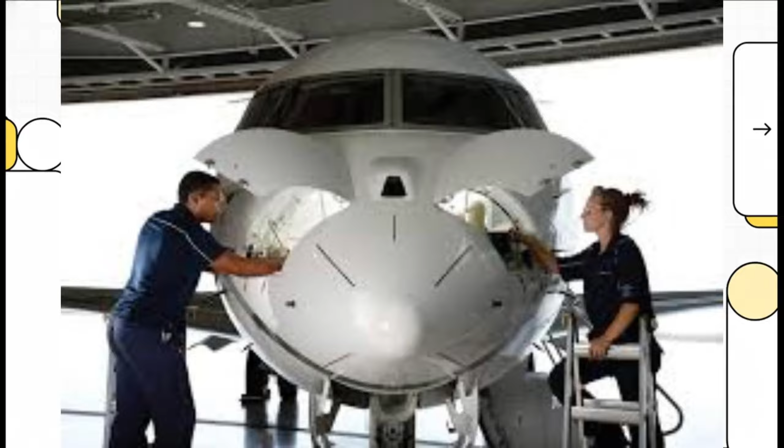You know, whenever we think about flying, our minds pretty much jump straight to the pilots, right? They're the ones in the cockpit, the visible face of safety. But behind the scenes of every single flight, there's an unseen guardian, a professional whose signature is literally the final word on whether that plane is safe to take off. And their story? Well, it's one of incredible responsibility.

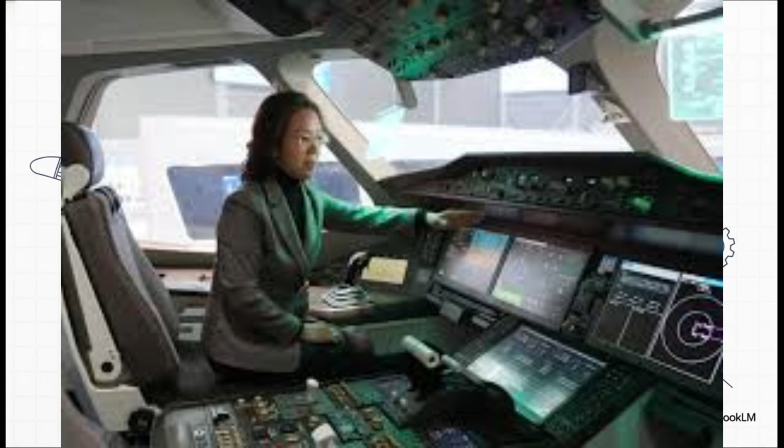So let me just ask you this. We all know the pilot is in command once the plane's in the air. But who holds the ultimate legal responsibility for that aircraft's condition before it even pushes back from the gate? The answer? Well, it might surprise you, and it shines a light on a critical role in aviation that most of us never, ever see.

The answer is the Aircraft Maintenance Engineer, or AME for short. Now, it's so important to get this right from the start. This is not just a mechanic. An AME is a licensed professional recognized by huge international bodies like the ICAO. They don't just fix things, they legally certify that the aircraft is airworthy. In other words, that it's safe to fly.

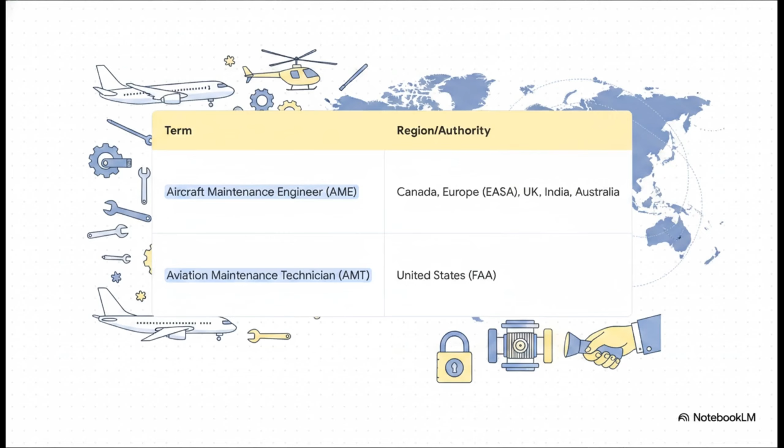Now, depending on where you are in the world, you might hear a couple of different terms. In places like Canada, all across Europe, the UK, India, and Australia, they're called aircraft maintenance engineers. But head over to the United States, and the FAA calls them aviation maintenance technicians, or AMTs. Here's the thing though, no matter what the title is, that immense responsibility is exactly the same.

So what does a day in the life of one of these pros actually look like? Let's take a walk through a typical shift for an AME who's working on the line. That's where the planes are actively coming in and out. It is a high-stakes, super fast-paced world that demands absolute precision.

A shift doesn't kick off with grabbing a wrench. Not at all. It starts with data. AMEs dive deep into the aircraft's logs from previous shifts. They huddle up with their team to talk about priorities, and then they map out a precise plan of action. It's this methodical, almost surgical process that happens long before they ever physically touch the plane.

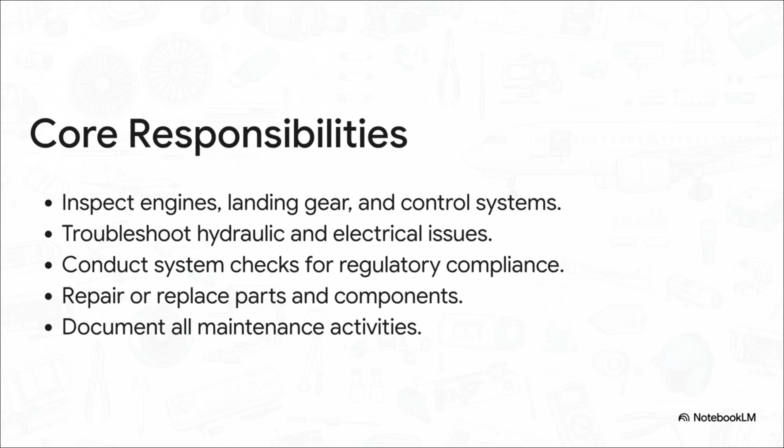Okay, once that plan is set, the real hands-on work begins, and the scope is just massive. We're talking about inspecting the very heart and soul of the aircraft. The engines, the landing gear, the flight controls, they have to be digital detectives, troubleshooting incredibly complex hydraulic and electrical mysteries. And through all of it, every single action has to be meticulously documented. Because in aviation, there's a saying, if it isn't written down, it didn't happen.

And this is exactly why that paperwork is so important. You have to understand, aviation is one of the most heavily regulated industries on the entire planet. Every single thing an AME does is guided by official manuals, just like this one from the FAA. There's zero guesswork. Every repair, every inspection is done strictly by the book, and it becomes a permanent part of that aircraft's legal history.

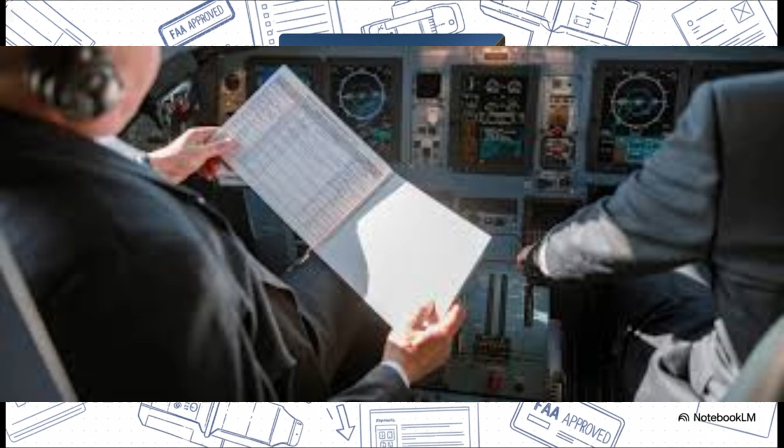This all brings us to the real core of what we're talking about today. We've been using the words mechanic and engineer, and yeah, they might sound similar, but in the world of aviation, the distinction between them is absolutely monumental. We're talking a world of difference in responsibility, authority, and career.

Okay, just look at this breakdown. An aircraft mechanic, they'll typically graduate from a great educational program, but to become a licensed engineer, you need that program plus years of hands-on apprenticeship, and you have to pass a series of really tough licensing exams.

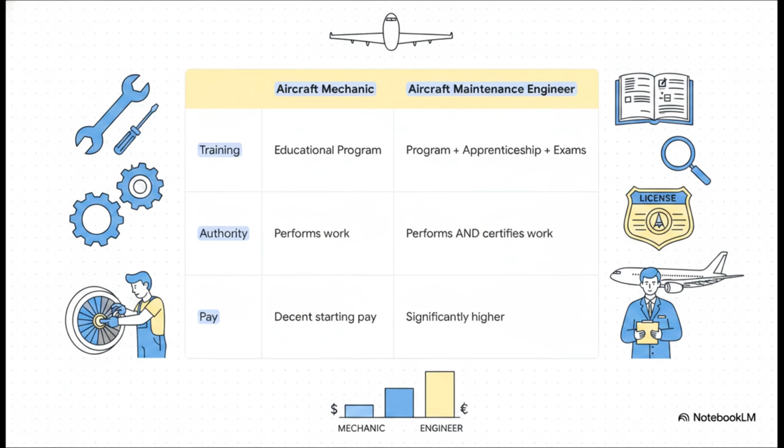And here is the single most important difference. A mechanic can perform the work, but only the licensed engineer has the legal authority to sign off on that work and officially certify that the plane is safe to fly. That authority gap is what creates the huge difference in pay and career opportunities.

And that legal power all comes down to one thing, the maintenance release. This document is everything. Seriously, think of it like a surgeon signing the chart after a successful operation. It is the AME's personal legal guarantee that everything has been done by the book and the aircraft is airworthy. Without that signature, that plane is going absolutely nowhere.

And the real-world impact of getting that license is just huge. We heard from one AME who said that after getting his license, the difference in his pay and the opportunities he had was, in his words, like night and day. That license, that piece of paper, is truly the key that unlocks the entire profession.

Now, getting that license isn't some one-size-fits-all deal. It's a lot like how doctors specialize in different fields of medicine. Aircraft maintenance engineers also have to specialize in different, incredibly complex parts of the aircraft. So you don't just become a generic aircraft engineer. You have to choose a path, a specialty, and become a deep expert in a specific domain.

The license itself is actually broken down into different categories that mirror just how complex a modern aircraft really is. Let's break down the big ones. A Category A license is for line maintenance. Think of the day-to-day stuff, minor scheduled tasks, fixing a broken cabin light. The B1 license is for the true mechanical expert, the person who can work on the heavy metal, like the engines, the airframe, the landing gear.

And then there's the B2 license. This is for the avionics specialist, the master of the aircraft's electronic brain. We're talking navigation, communication, the autopilot. And as you can imagine, with modern jets basically being flying supercomputers, these B2 engineers are in unbelievably high demand.

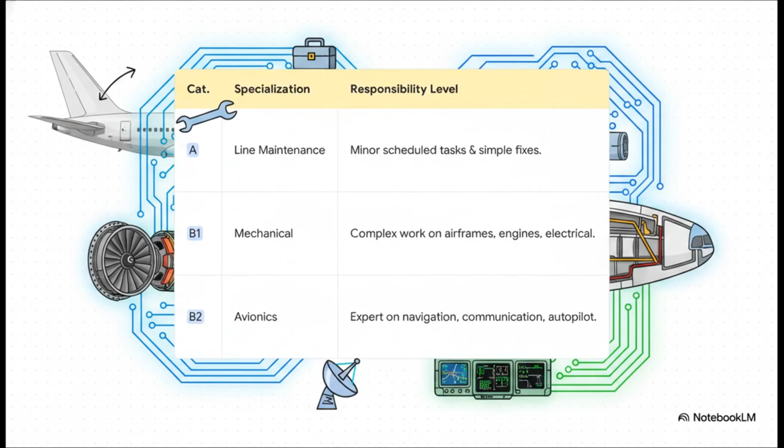Speaking of technology, the AME's job is not standing still. Far from it. The hangar of today is quickly turning into a high-tech lab, and the engineer's toolkit is evolving right there with it. I mean, this is where the job gets almost futuristic. Instead of just reacting to problems, AMEs are starting to use AI and big data to predict when a part might fail before it actually breaks.

Tasks like walking around the plane for an external inspection are being revolutionized by drones that can do it faster and safer. In the hangar, an engineer can put on an augmented reality headset and see a digital blueprint overlaid right on top of a real engine. It's a whole new world of smart sensors and predictive analytics, and it's all pointing to the next great challenge, maintaining a new generation of electric and hybrid aircraft.

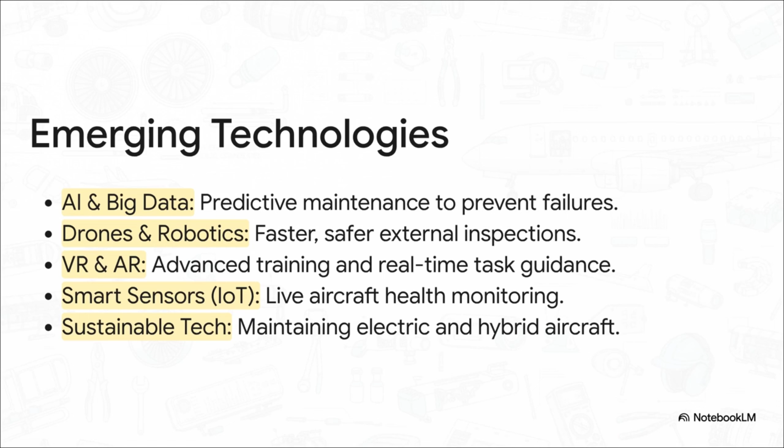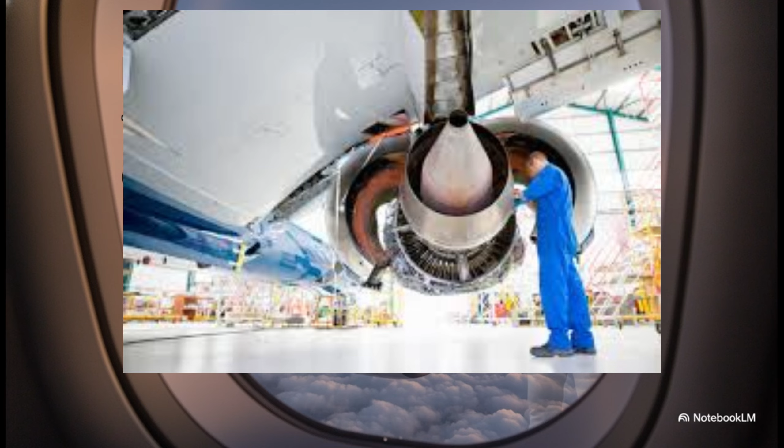So, the next time you're on a plane, settling into your seat, getting ready for that takeoff roll, just take a second. Remember that your safety isn't just in the hands of the pilots you can see up front. It's resting on the skill, the incredible diligence, and the signature of that unseen guardian, the licensed aircraft maintenance engineer who legally certified that your plane was ready for the skies.

And that kind of leaves us with one last big thought. As airplanes become more and more autonomous, packed with self-diagnosing computers and AI, will that final human check, that critical judgment and sign-off from a licensed human engineer, ultimately become the single most important safety feature in the sky? Something to think about.